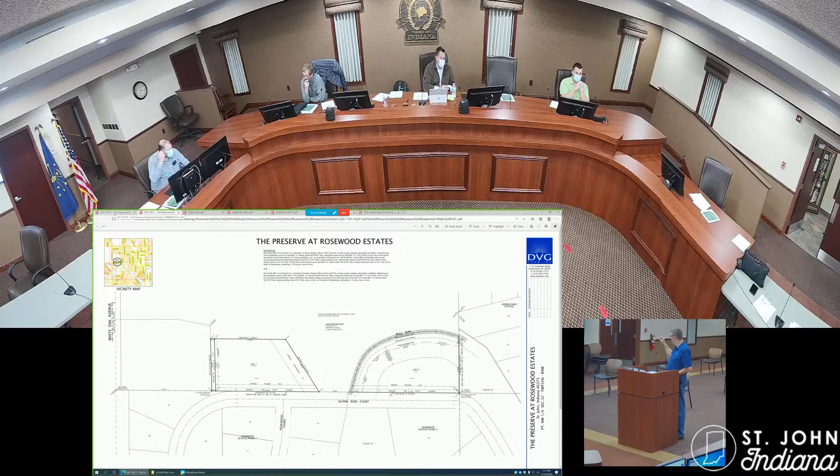And then the second question—if I read Ken's letter correctly from last meeting—you're looking for a sidewalk waiver? Well, we didn't really discuss sidewalks. Lot 2 has existing sidewalk in front of it, the lot to the east. Lot 1, we do intend to continue the sidewalk as far as we can, and there is an engineering drawing that shows the proposed sidewalk. But when Lot 1 is built on, the sidewalk that's in Rosewood will be continued along Lot 1 until it reaches the intersection of Rosewood Court, and then it will dive out to that intersection. It can't go any further because the bridge is there and the grade drops off about 5 feet behind the curb. So we'll bring sidewalk along Lot 1 about 300 feet, and then it dies back out—about 100 feet of sidewalk will be missing from the front of Lot 1.

My concern was at least connectivity to a driveway or some sort of front walkway that would lead to the door of that house. This drawing shows there's a sidewalk—see the existing sidewalk on Lot 2, same thing, it has to jump out to the street at some point because of the grade. So on Lot 1, we'll be bringing that sidewalk all the way to the intersection and then diving it back to Alpine Rose, to the east side of Rosewood Court, so you'll cross Rosewood Court and then bring it.

Did you say there's going to be a path here? Yes, that's the intention—to bring that sidewalk right where it joins in now and bring it north through that.

Again, connectivity like you guys have been talking about. We'd like Rosewood to have access to the bike path in Preserve along White Oak. They really don't have that now.

Councilman, I didn't hear your question. I had asked if the sidewalk was going to come up throughout Lot A from that 90 degree turn, and that's exactly what's going to happen. It'll go north throughout Lot A and connect to Preserves East.

So folks from Rosewood will be able to go up that sidewalk into Preserves East, cross over White Oak at the crosswalk at the intersection, and then connect to the bike path. Great.

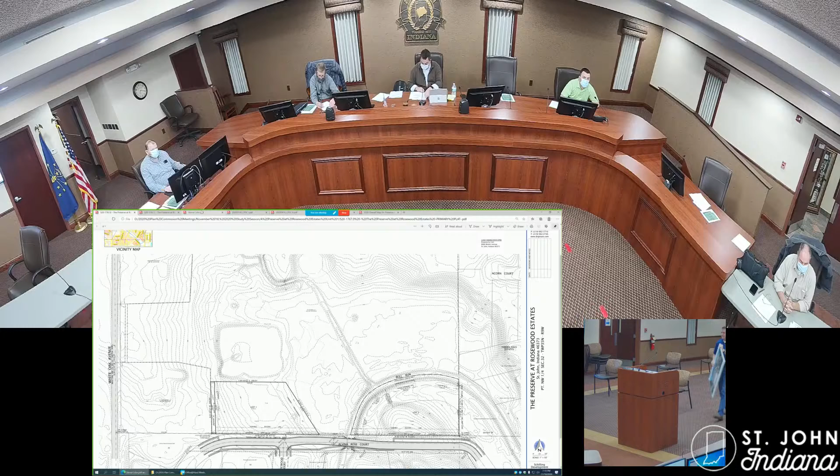Next on the agenda, 3B, Greystone Unit 3, continued discussion regarding the petitioner's request to rezone 40 acres from open space to R3 PUD, or I should just say PUD.

Oh, look at Jack. Oh, see? Look at that. Look at Jack. He's good.

I don't know how they'll be able to see those online. Good evening, Jack Slager again with Schilling Development, representing CWS Holdings, the developer of Greystone.

We've been discussing Greystone over the last few months, and for Phase 3 we are now proposing a single-family development. Craig has the drawing up there. We're requesting 80-foot by 140-foot lots, and at this point we need a favorable recommendation to the town council for rezoning from open space to PUD.

With the PUD, we are going to follow the R2 zoning ordinance other than lot width and lot square footage. Other than that, we will follow all of the R2 requirements, including minimum square footage, minimum side yard, minimum rear yard, and minimum front yard. So we're just looking for a little leeway on the lot width and overall size.

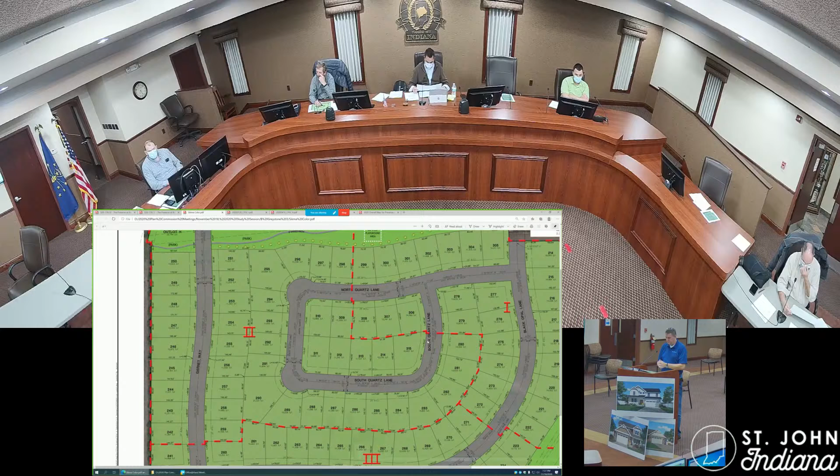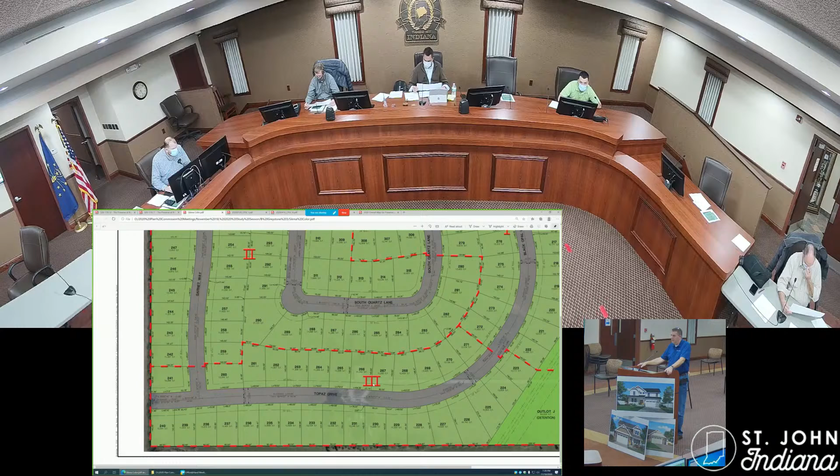So that layout criteria is in the upper right of this drawing, calling out the minimum lot 80 foot wide, minimum lot size 11,200, front yard setbacks are the floating building line, the side yard setbacks 8 foot minimum, rear yard setbacks—we're able to keep the 40 foot rear yard setback, which is pretty large, but we made sure all the buildings would fit on these lots with a 40-foot rear yard, so we are going to keep that rather than ask for a variance on that.

I'm trying to scan over so you can see, but I'd also like to see the architectural standards you're setting and all the other nice amenities that you're proposing with the irrigation and the landscaping. Yeah, that's part of our restrictive covenant, so we'll make that part of the package of the PUD package. Great, thank you.

Craig, am I missing anything that needs to be included? No, just those elements, I think.

Jack, are those yellow dots along the north side trees or something? Those are trees - I asked them to be green, and they ended up yellow. I wanted to put a buffer between the backs of the houses and the playground. The playground can move anywhere we want it to. I put it in the largest open area of the park and figured we'd shield it a little bit. This also gives us room to do some hills and berms between the homes and the bike path, so we can do a little creativity in there.

Any additional questions for Jack from the board?

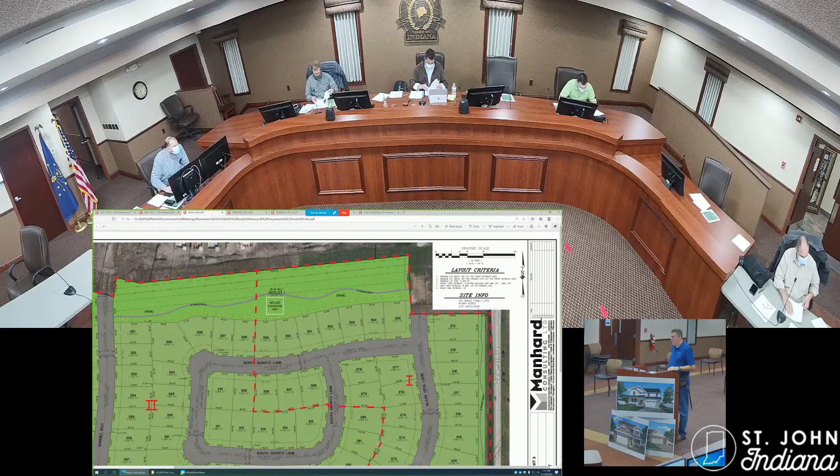The preserve has been around for a while, maybe longer than some of the plan commission members have been on board. So I wanted to recap and bring you up to speed as to where we're at and what we're doing, because I know some of you get questions on this stuff, and we're just kind of moving along out there all the time. So I thought I'd bring you up to speed.

I'm gonna pass out a bigger map for you because I see you're working with small maps again - I want you to be able to see what I'm talking about. Well, they've got it on screen too. There we go. Got a love the high paper quality - it's printer, laminate too. Jack, quality here. Yeah, look at this, this is quality. We need to upgrade.

So just a little recap on the preserve - the project began in 2015. Our first phase of lots was developed in 2016, and at that time we anticipated an 8 to 10-year project. We've developed 4 phases over the last 5 years. We just completed Phase 4, which is in the northwest corner of the south half. And we've started moving dirt on Phase 5 - if you've been by there, you've seen some activity. So I wanted to talk about what we're doing there and some of the changes we've made.

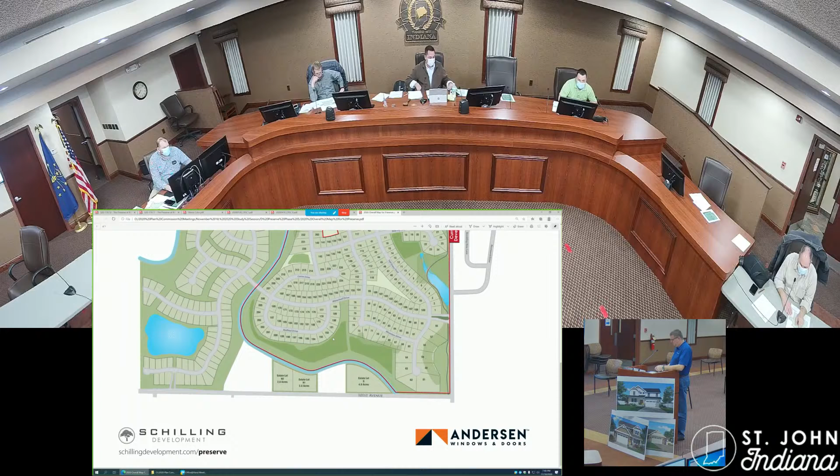So, long-term planning, just for the Plan Commission - Craig worked on the Pathways application recently with NIRPC, and the segment that would connect where this ends and continue west to Bramblewood was talked about. Not quite ready to get that on an application, it didn't qualify for a few reasons, but we would eventually like to see this path continued along 93rd through that white box or around it, and around that corner into the Bramblewood sidewalk at the very least. There's another home that's not in town too - an individual home just past the preserve at Shilton Hills. So there's a few obstacles, but it seems like a logical, doable connection - it's less than 1,000 feet of missing piece.

This section we're now adding to White Oak is a half a mile. We'll have another half a mile horizontally along 93rd, and we've already constructed a half a mile along White Oak going south. So right there, we've got 1.5 miles of bike path, and it's pretty nice.

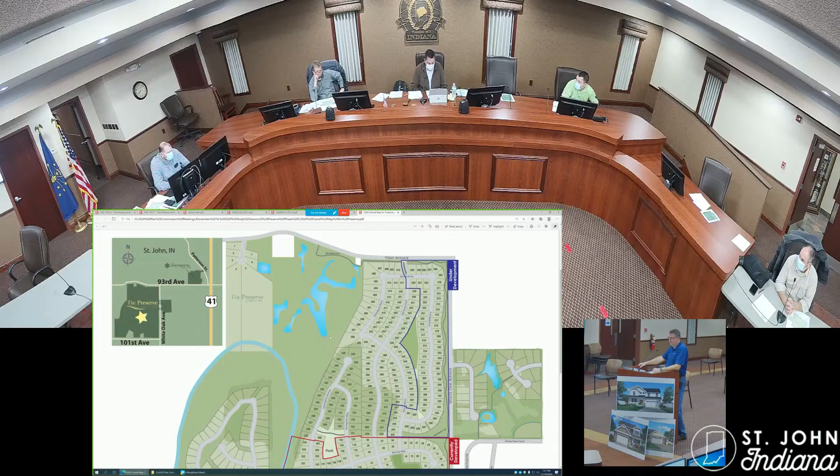I don't know whose responsibility this is, Jack, but as we make these points at 93rd, I don't know if it's the town's responsibility to make sure we have the proper crossings if people go north and south on 93rd, especially to Shilton Hills and Monix Drive, because you're going to get a lot of people on the north end trying to get south on that bike trail. Already planning it.

I guess my wife saw the signs up, she got excited - she'll be riding her bike to work next summer. Nice, very, very good.

Jack, the park - have you guys thought about trying to put it in where the woods are at? Well actually, it is, and that's part of this. I don't know why it doesn't show up green that way, but that section is where the original homestead was.

It was one of the nicest pieces of land out there, where the barn and the house was. We just recently got done taking all of that out, so the barn and the house are finally gone. So that's where the park is? Yeah, and there's some beautiful oak trees there, and that's really why we selected that spot.

So we're hoping to save as many of those as we can. That's where that long driveway was, running east-west through there. I didn't think the house was in the woods. No, it's right on the edge. The house actually sat right here on 262 and 263, and the woods is all up in here.

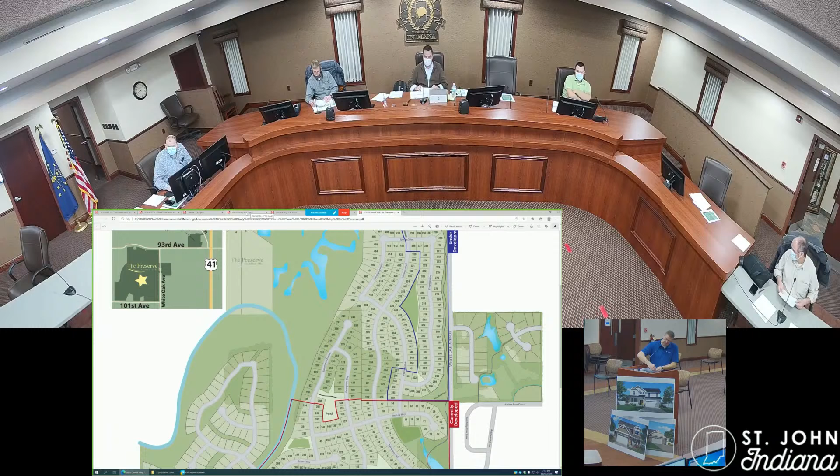Sorry Jack, didn't give you enough time. I'm Jim Jabay, representing Crown Point Christian School. I don't know if you'll be able to see that very well yet. Which map do you want me to have up? Oops, not that one. You said your name was Jim? Jim Jabay. Thank you for your patience as we moved the agenda item. Perfectly fine, no problem, no big deal. Thank you, that one? Oh, that's a little bit better.

So essentially, there are two parts of our addition, both of which will be inside of the setbacks for the subdivision. One of those is at the northeast corner of the property, off to the top left-hand side there. That's 3 classrooms. Let me see if I can rotate this. Is that west? No, it'd be the northeast, I'm rotating it.

Is that it? There it is. Top of the page is north now. So that northeast corner, top right, would be 3 classrooms, which would fit within our setbacks.

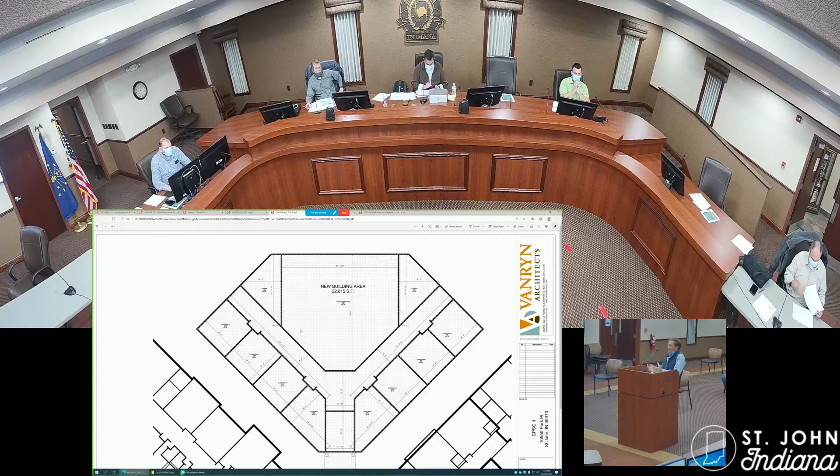Below that is the larger section we're proposing to build, which would house about a 22,000 square foot general purpose meeting room, used for chapels and different presentations, along with approximately 6 classrooms. There might only be 4 used as classrooms—1 or 2 might be used for special things like choir and the music department, which would leave fewer classrooms. So it'd be somewhere between 4 and 6 classrooms. There's enough room for 6, we just aren't sure how we're going to divide that space yet. So really, it's just those 2 sections we need to fit into the school.

Schools have grown a lot over the past years, and we need more space for our students.

So Jim, apologize, bear with me—the 3 additional classrooms are on the northeast side of the building, right along Park Place, correct? Correct. And then the 22,815 square feet would be on the due east side, in front of and parallel to Park Place as well. And this is currently in a PUD, correct? Correct, so it requires site plan approval, which they intend to submit for the December 2nd meeting, based on the feedback from this meeting.

Yes, in the conversation that Mr. Jabay and I had. In addition, the biggest concern obviously is whether or not there's adequate parking, and there is plenty of parking for the proposed addition.

Because if there's an event... the parking standards need to be met based on the number of employees, so we did that calculation, and it's more than adequate based on that.